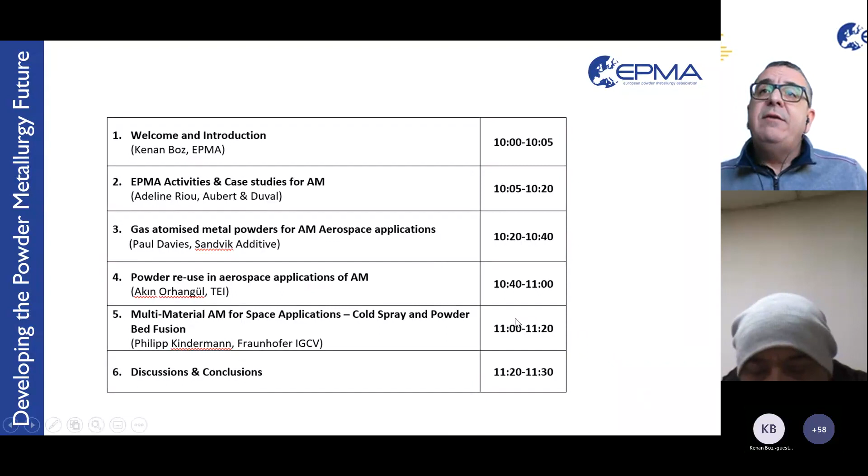And before that, I will give some information about the SAM project, and then we will finalize his slot by some interesting case studies, especially from AM. So good morning, Adeline. You can hear me, I think. Good morning, Kenan, and good morning, everybody. Yeah, thank you for joining.

Okay, so this is our short agenda, but as I said, unfortunately, Akin will not be able to join. Now we can continue with our agenda as possible. So let's start firstly by our explanation of the activities for the SAM project and what we have been doing so far in this big project. So maybe you can change the slide, Adeline.

As you all know, SAM is an Erasmus Plus project with 17 partners all around Europe, with industry representatives, education and training providers, and umbrella organizations like EPMA, Cecimo as well. The coordinator is the European Welding Federation. The project is supposed to be over by the end of 2022, but it is extended to end of June of this year. Next slide, please.

So in SAM project, one of the biggest achievements was the development of an international AM qualification system, named IAM-QS, which will ensure the transfer of knowledge process in a harmonized way for every organization internationally. Also, the IAM-QS provides a way to recognize technological knowledge for AM personnel. It supports through innovative training guidelines that cover the front-end emerging technologies of AM at an industrial level. It addresses specific industry needs and involves trainers from industry and case studies based on real industrial issues. It is also recognized as a best practice international qualification system by the European Center for Development of Vocational Training. So next slide, please.

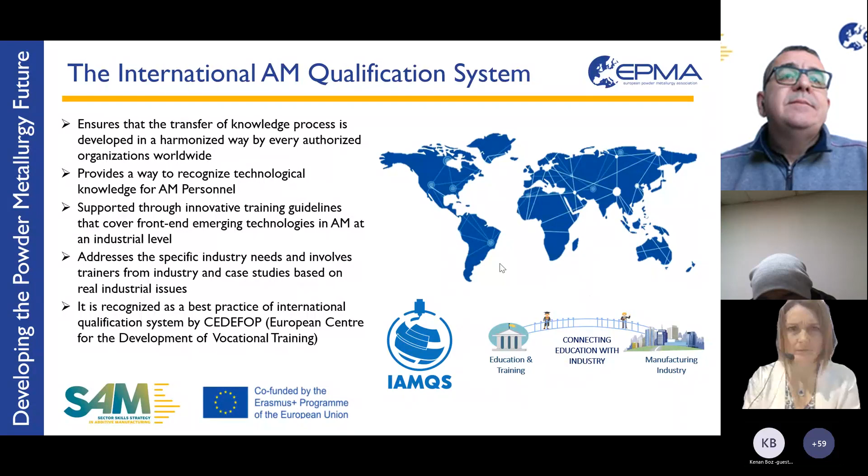So these are the AM qualifications that have been developed up to now, together with the SAM project as well as previous projects that are the ancestors of SAM. Profiles of AM process engineer, AM supervisor, AM operator, and AM designer have been determined. Their qualifications have been investigated and listed and prepared, and some work is still going on for other profiles for the AM-QS system.

As you may have followed such activities of EPMA or Euro AM Group, we organized some SAM free courses last year, and the year before as well, for developing the competence units as a kind of piloting training courses. They all worked quite well. In total, we had 28 hours of lecturing and more than 170 students attended these courses. These are now all accredited or certified course programs within the harmonized system of IAM-QS. You can follow all the recordings of these courses on the EPMA website.

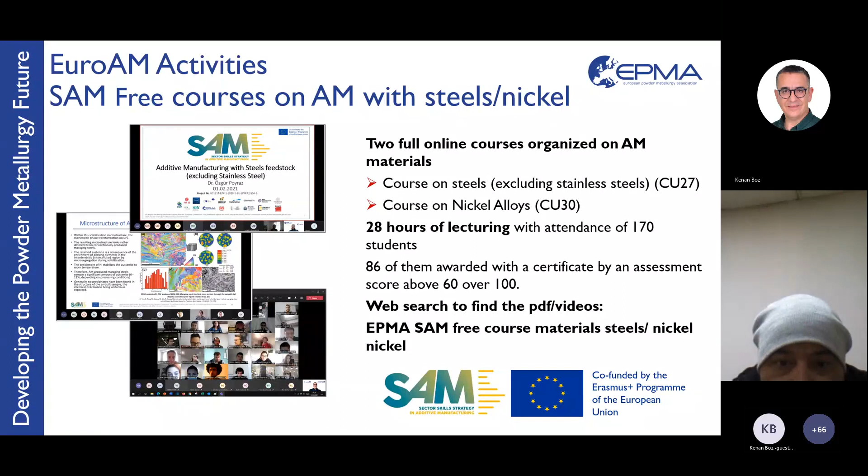So I'm going to highlight some activities planned by the group this year. One is the organization of a Euro AM seminar in May, which will be on site again after a few years of online webinars. It will run from the 9th to the 11th of May in France, in the city of Metz, in the northeast of France. The key topic will be metal powders in additive manufacturing, along with highlights of AM processes, advanced materials, and emerging technologies. It is organized together with the French Institute IRT M2P. So this is one key event.

We'll have then, of course, the European conference in October, which will take place this year in Lisbon, in Portugal.

Another key point is the publication of the 4th edition of the Introduction to Additive Manufacturing Technology brochure. It's a document which was first released in October 2015. We plan to release this year the 4th edition in order to update different chapters, in particular the technology chapter, improving the chapter about metal binder jetting and other sintering processes involving metal powders for additive manufacturing, as there has been a lot of new activity in this field. We'll also update the EBM chapter, the SLM chapter, and so on.

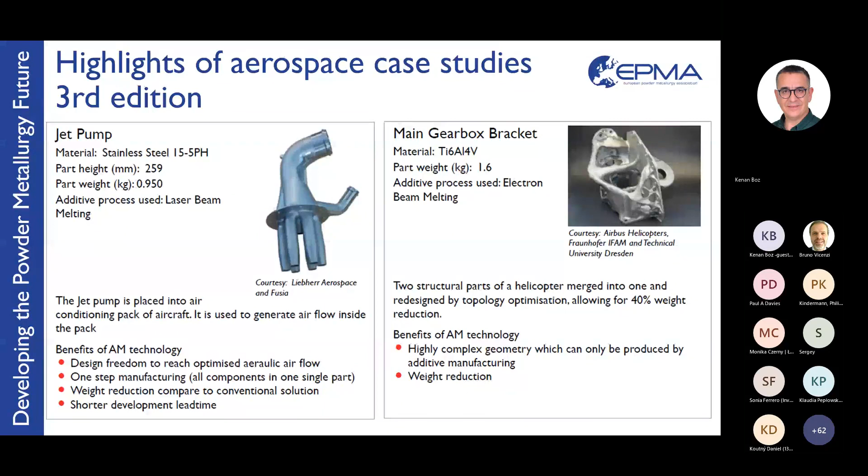If we go upper in space, here we have two nice case studies. One from Ariane Group and Volum-e about a casing for the Prometheus engine made with 718 material. This is a quite massive part, as you can see, which was produced on an EOS M400 machine, showing the design capability offered by additive manufacturing, in particular to minimize the supports for a large component.

On the right, you have a thrust chamber designed by Cellcore and produced with an SLM 280 machine by SLM Solutions, which is also an impressive part, with a height of 110 millimeters, made with Inconel 718, offering significant advantages versus conventional part manufacturing, in particular integrated design, mass reduction, and time saving.

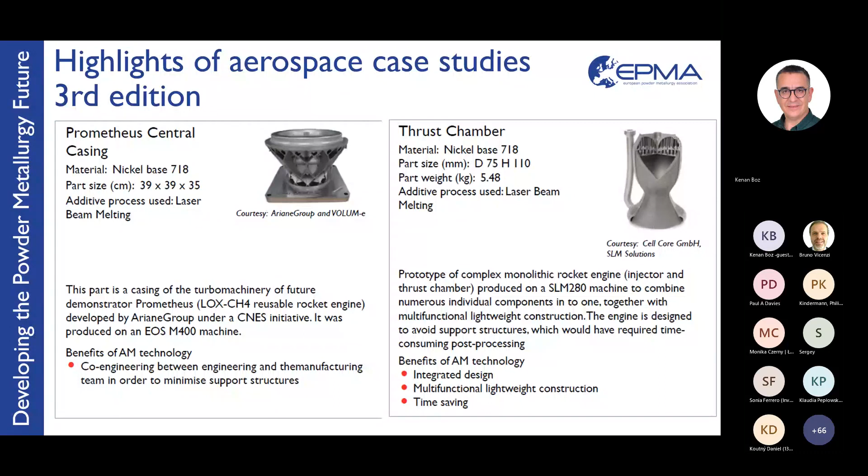So these were some of the case studies highlighted in the current edition of the Introduction to Additive Manufacturing Technology brochure. We are in the process of collecting new case studies. Here I wanted to show a few of the new ones we will publish in the next edition, and call for contributions if you have more case studies to provide for aerospace, and also for other segments.

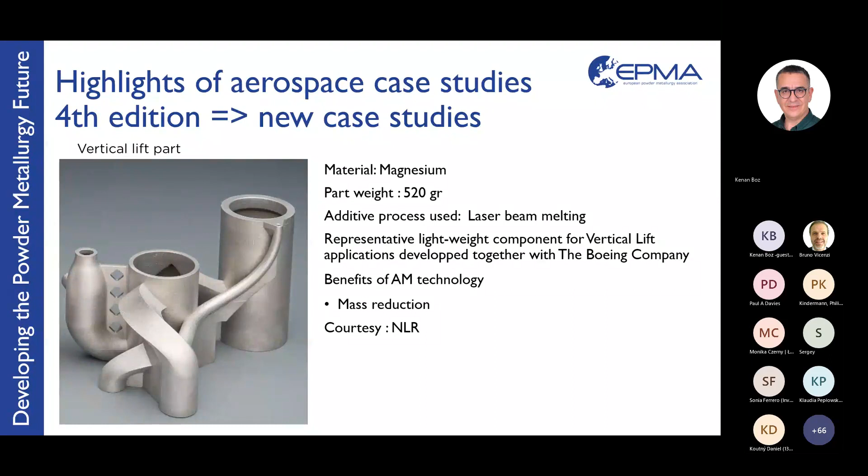Another case study which will be included in the brochure is a combustion chamber for a liquid-fueled rocket engine, made with nickel-based ABD 900 AM material. It's a part with a height of 291 millimeters, and it was successfully fired by Airborne in March 2021. The benefit of additive manufacturing in this application is integrated design, the ability to provide thin walls and complex cooling holes, and the high temperature strength provided by the ABD 900 material. This was done in collaboration with Renishaw and Alloyed in the UK.

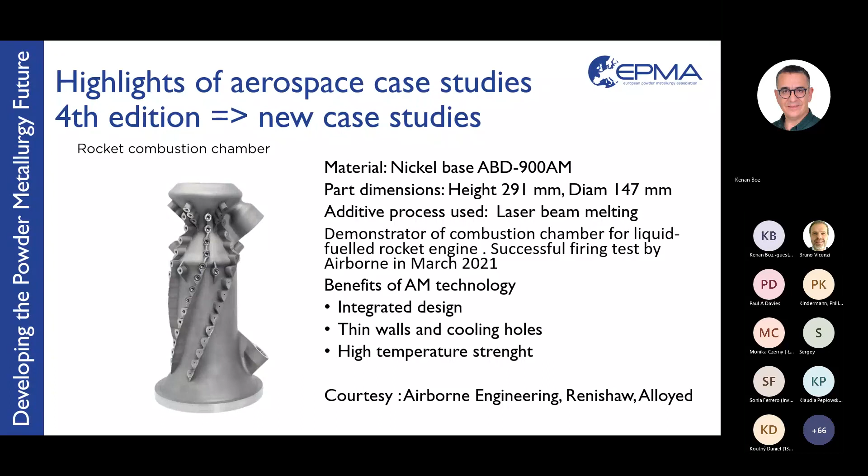So these are some highlights of aerospace case studies.

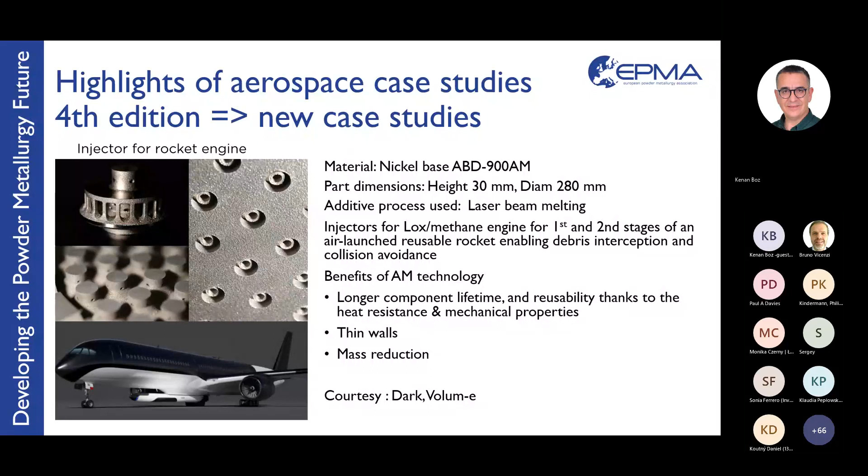We plan to release a new edition of the additive brochure in October at EuroPM in Portugal, and we will be glad if in the audience you want to contribute, or if you know people who could contribute with more case studies. The deadline for submission is in March, and we will welcome case studies for not only aerospace, but also energy, medical, industry and tooling, automotive and car racing, or consumer goods - any original application that demonstrates the interest of additive manufacturing with metal powders, as there has been a lot of progress in applications of the technology since the last edition in 2019.

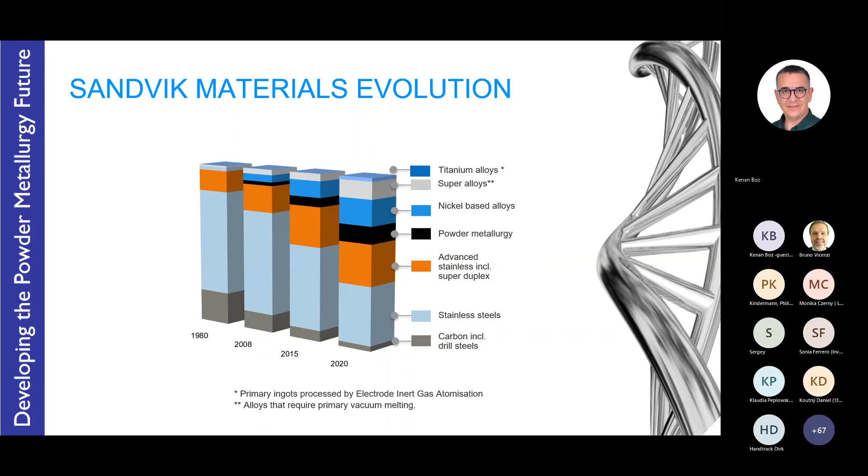Okay, so first of all, I'll start with Sandvik's materials evolution over time. Sandvik's been involved in the metals industry for more than 160 years, evolving from steels and carbon steels for the rail industry originally to stainless steels, then advanced stainless steels such as super duplex, which is heavily used in the oil and gas industry. Powder metallurgy then started to make an impact on the volumes of materials that we produced, and the interest in nickel-based superalloys for aerospace, and superalloys, which are of course melted under vacuum, mainly nickel-based alloys, and more recently titanium alloys.

So now looking at powder production processes. Plasma atomized powder is a well-established production process for manufacturing gas atomized powders, typically using argon gas. The raw materials for this process typically include wire-based feedstock, imported into the plasma atomization facility from a spool. So there's a wide range of different materials available, but it does rely on wire-based feedstock. Here you can see an arrangement of plasma torches, which provide both the heat to melt the feedstock and the gas supply to atomize the powder. Plasma, at the end of the day, is basically very hot gas, and it's a very well-established process for additive manufacturing, providing a range of different sizes, typically coarser to mid-size fractions.

Then we have a very well-known process called plasma rotating electrode process. This, again, is a very long-established process where the raw material is a rotating electrode, and again using a plasma arc to both melt the raw material and provide gas to create the particle surfaces. Because it's rotating, the forces involved spin off the powder particles, and then they're captured in a cylindrical construction. This process typically produces very spherical powder, generally of a coarse fraction.

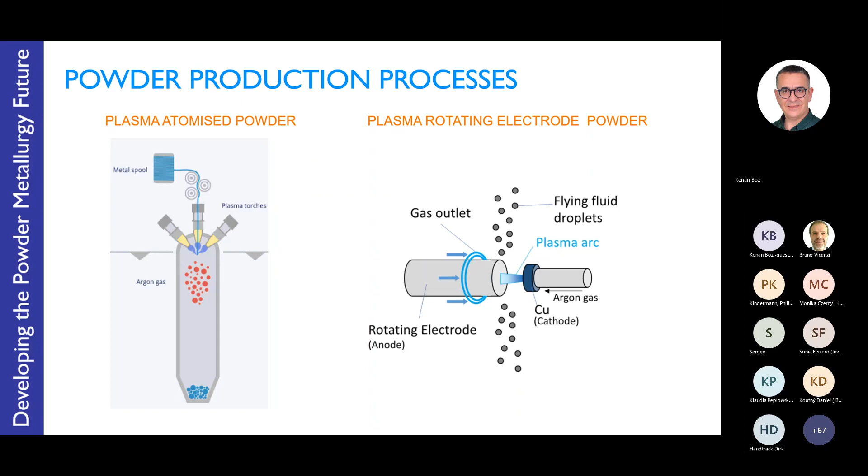Now I'll move on to inert gas atomization, which from a volume production process produces the highest volumes of powders for many different applications in aerospace, including hard surfacing and thermal spray materials. Originally, back more than 30 to 40 years ago, these types of powders were produced for coating turbine blades, for instance, and many other applications, and it has diversified into powders for metal injection molding, and more recently additive manufacturing.

Here you can see the construction of a typical inert gas atomizing facility. The raw materials are typically alloyed in a coreless induction furnace, often prepared in a melting enclosure of inert gas, which provides a partial pressure to protect the molten material from oxidation and reduce slag generation and oxides, often using nitrogen gas, which is the lower cost gas compared to argon atomization, but both are typically available on these types of facilities.

The molten material is sourced from scrap materials or alloyed in situ to create a diverse range of different materials, typically top poured, sometimes bottom poured, into a tundish, usually conical shaped, and the molten material is then drawn into the atomizer and impacted by high pressure gas, which can be in various different arrangements, from close coupled atomization for fine powder to two-stage atomizers for mid and coarse size fractions. So you can atomize different size distributions based on the configuration of the atomizer.

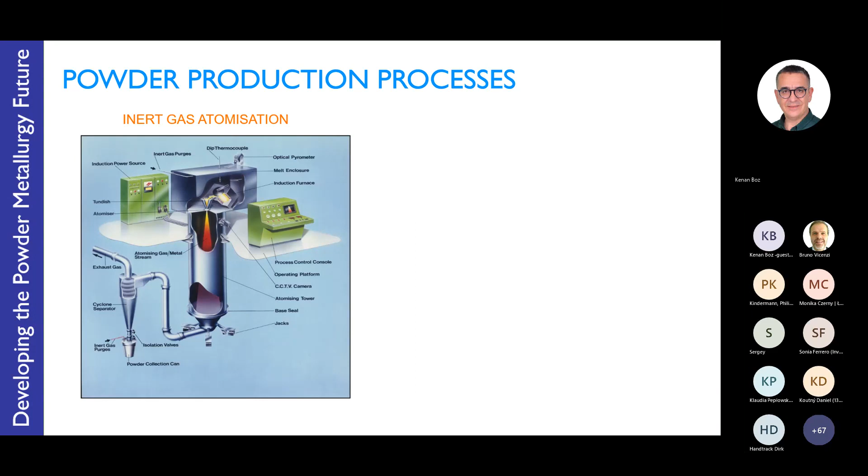This configuration does allow for recycling of the gases, and for argon that is sometimes justified in terms of the capital equipment investment.

As I mentioned, gas atomized powders have a spherical shape which imparts good flow characteristics. Because of the melting enclosure and the relatively clean process, metallurgically clean, it provides good performance when it comes to mechanical properties. The powder has a broad normal size distribution, as you can see from the diagram, and a very spherical shape across a range of different particle sizes, which provides good tap density or packing density. That can be very advantageous for additive manufacturing, providing uniform layers with good flow characteristics.

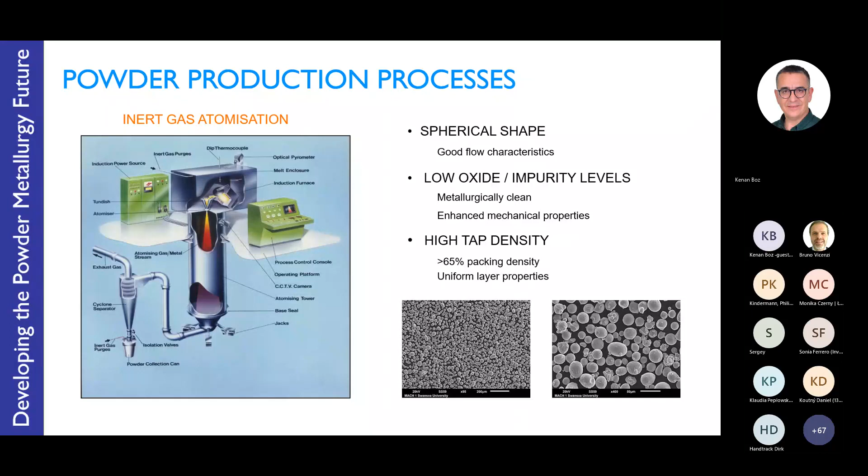Moving on from inert gas atomization, the premium process is the vacuum inert gas atomizing facility. A similar configuration, but in this case the melting process is completed, often top pouring again into a tundish, using a hermetically sealed chamber, where the various alloys can be trimmed and samples taken. It's a very efficient and metallurgically clean process when it comes to melting. Because it's done under vacuum, it produces much less oxidation of the melt, which in part improves performance.

Of course, you can't atomize under vacuum, so you have to typically backfill with argon gas. Most of the vacuum inert gas atomizing facilities run with argon atomization, but sometimes nitrogen is also available. Here you can see an example of a superalloy Inconel 718 powder with a size distribution of 15 to 53 microns, and a median size, D50, of around 32.7 microns.

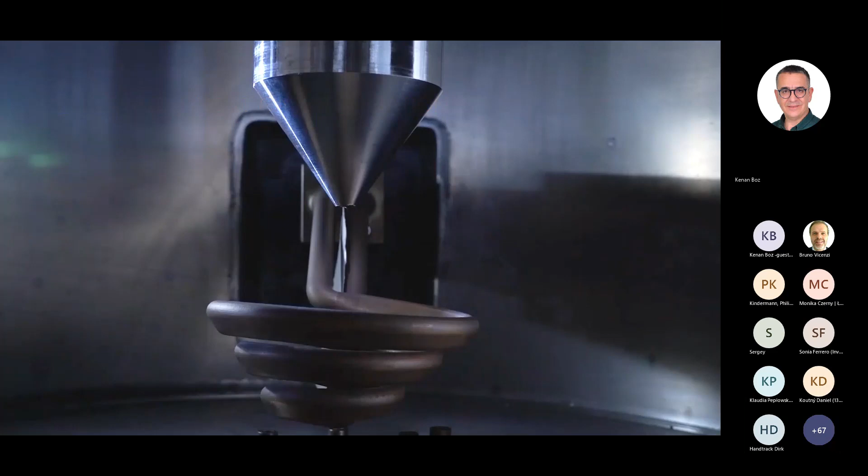Next I'll provide a little animation of a process called electrode inert gas atomization. You can see the electrode at the top. In this case, it's a bar stock material, inserted into a copper coil, which is actually hollow. That induces an electrical current, or eddy currents, in the electrode to melt the material. That coil is actually produced by additive manufacturing — see its complex shape. The molten material then free falls into the atomizer.

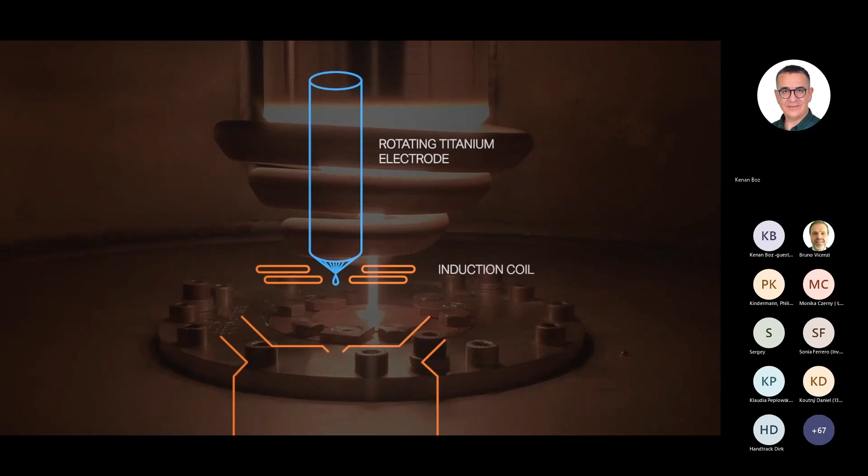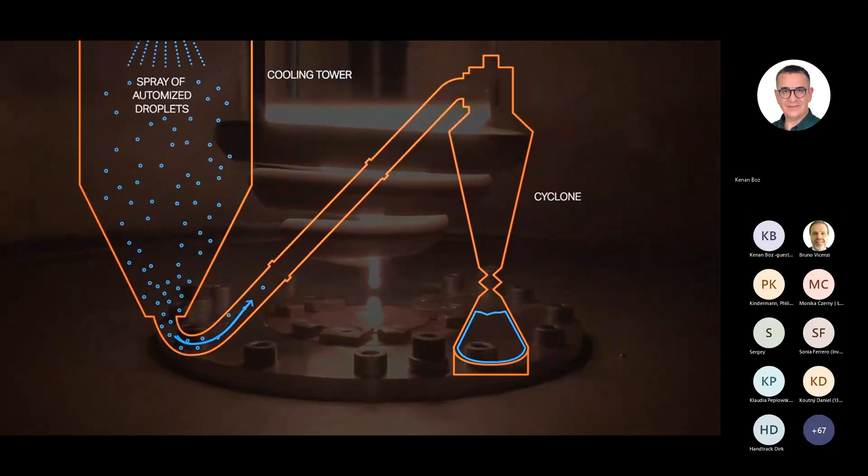In this case, it's titanium, so it has to be a refractory-free process. The atomization gas then impacts that flow of molten metal material. As it falls through the cooling tower, it solidifies, and again the powder is separated from the gas and collected. In this case, the titanium powders produced by electrode inert gas atomization are often handled under complete inert conditions, so the blending, sizing, and packing are all done under argon gas.

Just to highlight Sandvik's facilities in this area, we have inert gas atomization in the UK, with 10 inert atomizers, and have been producing powders at this location in South Wales, the Osprey facility, for more than 40 years, employing both argon and nitrogen atomizing. We have a range of different size distributions, from an average size of 5 microns up to 80 microns, providing powders for different applications, aerospace approved, with various ISO standards associated with health, safety, and environment, and ultimately providing credibility when it comes to sustainability.

In Sweden, there is a vacuum inert gas atomizing facility, mainly producing nickel-based superalloys, although it has the capability to produce various different materials including copper alloys, and an electrode inert gas atomizing facility dedicated typically to titanium alloys, using argon atomization. These plants typically produce slightly coarser average size distributions, from 20 microns, with coarser powders for applications like hot isostatic pressing. This facility is AS9100D Aerospace approved, and also has some medical certification for the titanium powders.

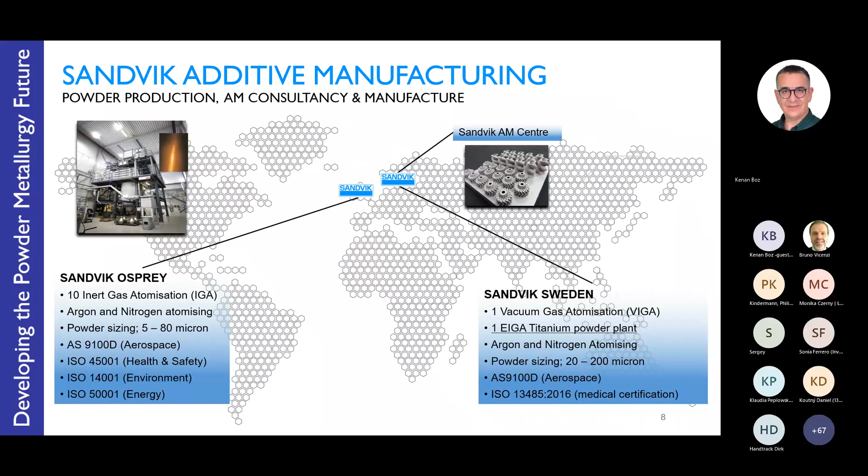When you produce powders, of course, you want to evaluate their performance. Sandvik has an additive manufacturing center of excellence in Sweden, with capabilities in laser powder bed fusion and binder jet printing. Sandvik also has links with some of the largest European additive manufacturing service centers, based in Italy from the BEAMIT facilities, and 3T in the UK.

Now moving on to the range of alloy powders for aerospace - they certainly are comprehensive. Inert gas atomized powders typically produce stainless steels, with 316L and 17-4PH accounting for the vast majority of stainless steels produced. Super duplex and duplex stainless steels, maraging steels, which were invented in the 60s and found applications back then for landing gear in aerospace because of their high strength and high toughness, have had a renaissance in additive manufacturing, typically because these materials have high strength but don't rely on carbon to impart that strength and hardness.

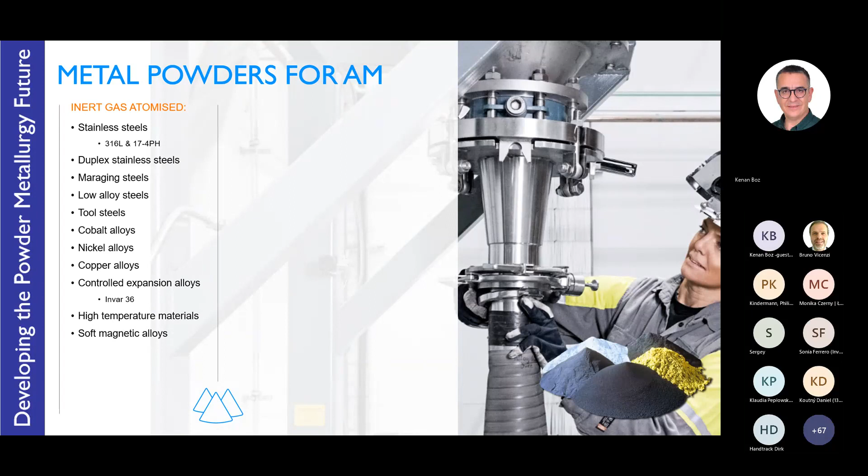Then we compare with vacuum inert gas atomizing, employing the process to manufacture nickel-based superalloys, so Inconels, as well as many more, and there is work going on to expand the range of nickel-based alloys. Copper alloys have also been applied, including copper chrome zirconium, and alloys developed by NASA called GRCop-42 - these are copper chrome niobium alloys. They're stable at high temperature but still impart good thermal conductivity. Electrode inert gas atomizing typically produces titanium alloys.

Of course, the workhorse of the aerospace industry is titanium 6 aluminium 4 vanadium, as well as commercially pure titanium and alloys related to the aerospace industry like titanium 6242, which has a slightly higher strength than titanium 64 and operates at a higher temperature also. Zirconium alloys are also possible and used in the nuclear industry. Then plasma atomizing produces titanium powders, titanium aluminides, titanium nickel like shape memory alloys, and titanium niobium, cobalt alloys, copper alloys, nickel alloys, as well as refractory metals - tungsten, niobium, and tantalum - and there are many others.

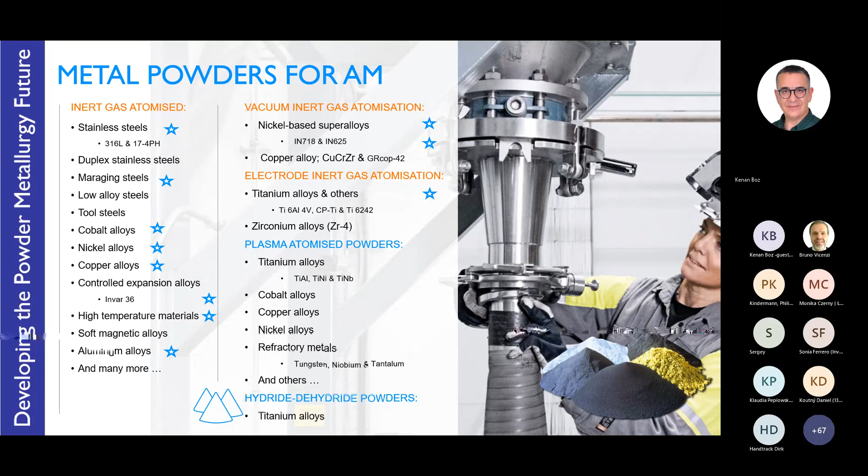Titanium, cobalt, copper, and nickel-based alloys are also available in plasma atomized powders. So now comparing the different types of powders: gas atomized, vacuum gas atomized, even water atomized are popular in metal injection molding, and plasma atomized.

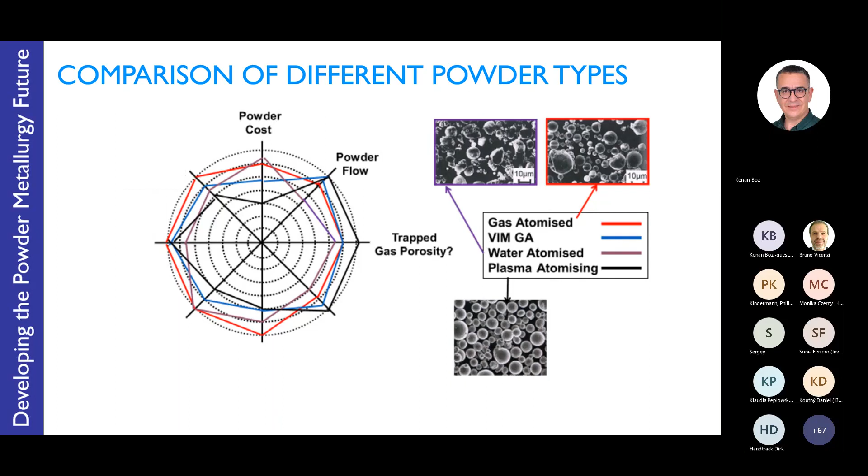You can see there are various morphologies of the powder that impart different properties. We have to consider cost of the process. Inert gas atomizing is generally the lower cost, with higher throughput in terms of volume and flexibility. Powder flow is an important characteristic, especially for layer-based systems like powder bed fusion and electron beam.

Entrapped gas porosity, especially for coarser powders, the oxygen level - there's no doubt an advantage for vacuum melting as well as plasma atomizing. The wide range of different materials available is certainly dominated by inert gas atomizing with its flexibility in terms of alloying.

The size range available - inert gas atomizing has been optimized for producing various different size ranges, with some advantage especially when it comes to fine powder production, typically in binder jet printing. Then there's packing densities and compatibility with different additive manufacturing processes. So, the powder attributes.

Key factors when purchasing powder: the shape and morphology have to be taken into account, and the degree of satelliting, which can impart issues related to flow characteristics. Often the atomizer's process has been optimized for specific applications, and anti-satelliting technology has been employed in inert gas atomizing for many years.

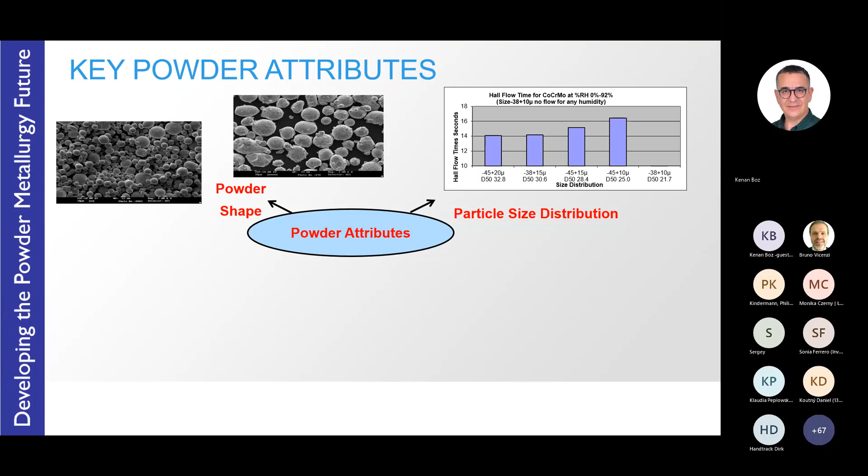The particle size distribution and its flow characteristics are important. Issues such as humidity - the Euro AM has a project starting to investigate the effect of humidity on flow characteristics. Here we can see the different size distributions and the effect on Hall flow rate.

As the average size drops, typically the flow of the powder becomes poor, until effectively, if you try to measure it by a Hall flow meter, it becomes very difficult, if not impossible.

Then batch-to-batch consistency - this can be for both size distribution and also the chemistry, and I've highlighted oxygen content, for instance. The starting oxygen content can have an influence on the use of the powder in service during laser powder bed fusion.

After a time, of course, it will pick up more oxygen, so having low levels of oxygen in the initial powder is sometimes an advantage. That's where vacuum melting in particular can be very attractive.

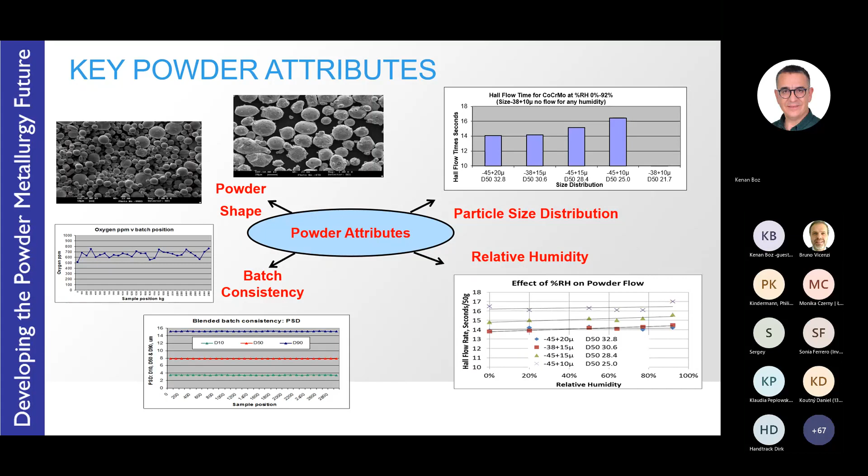Once you understand powder attributes, you have to develop test methods for establishing chemical composition, and analyzing the composition of powder is sometimes challenging. You have to develop standards and processes specifically for metal powders.

Size distribution, laser diffraction, and sieve analysis are very well established, as are flow meters - Hall flow meters, Carney flow meters, and even more recently, rotating drum methods of understanding the flow of powders is becoming very important.

Especially as the technology related to powder bed fusion is very much reliant on flow characteristics. Then we have other test methods for density of the powder - tap density, apparent density, morphology, microstructure, and thermal conductivity.

When you have done some testing, you need standards to measure these tests, and there are a growing number of test standards. Here's a few examples from ASTM for sieve analysis and sampling, oxygen and nitrogen content in titanium alloys, for instance. There's a growing body of standards where the aerospace industry can ensure reproducibility and conformance is important.

ISO standards are now linked directly when it comes to additive manufacturing to the ASTM committees as well. I myself represent the British Standards Institute as a representative on many different standards committees, and currently we're working on standards for Inconel 625, for instance, as well as stainless steels.

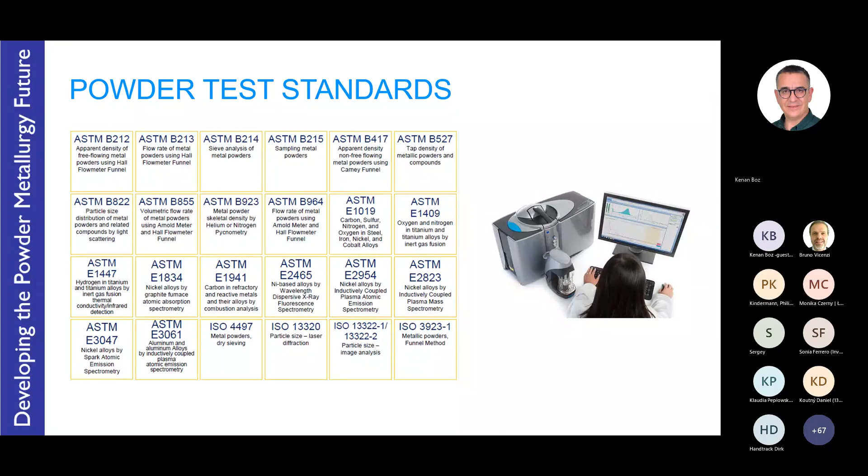Now talking about one particular aspect, powder size distributions - atomizing fine powders as well as mid-size fractions and coarse powders. These can be atomized, targeting different distributions for different additive manufacturing processes. Fine powder is typically used in metal injection molding, but also now finding interest in binder jet printing.

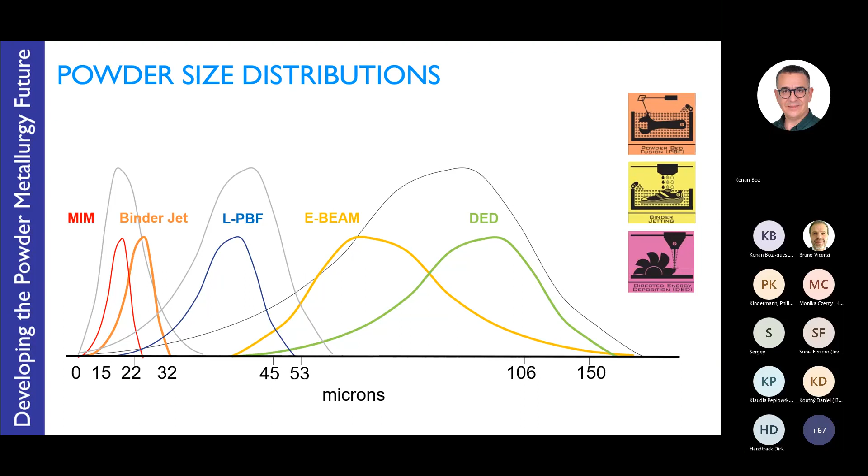Of course, the laser powder bed fusion, electron beam, and directed energy deposition processes, and even coarser or full fractions used in hot isostatic pressing of net shaped components, but also a very useful technique for consolidating the microstructure and eradicating pores - optimized for additive manufacturing.

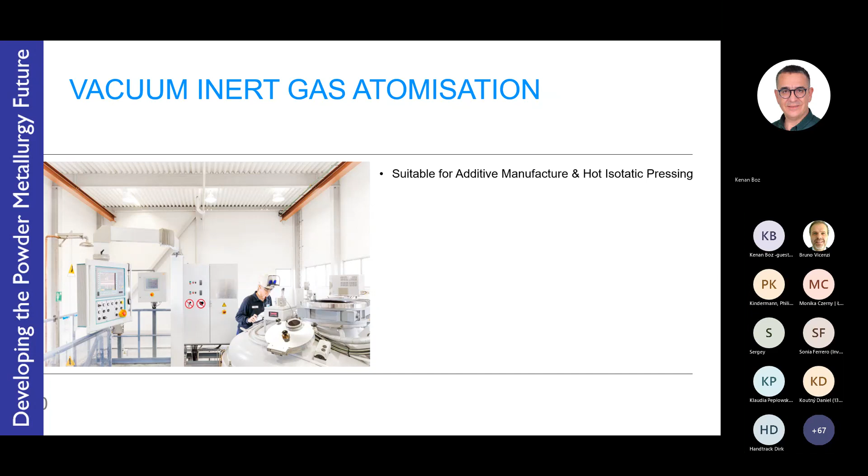Here you see the setup for a vacuum inert gas atomizing facility, producing powders for additive manufacturing and hot isostatic pressing. Compared to an open furnace situation, it's a much cleaner and safer approach, and I'm sure over time more and more facilities will be adopting the vacuum inert gas atomizing process.

It is currently producing a very wide range of different atomized powders in Inconels, nickel-based alloys, as well as more advanced grades like Hastelloys, Rene alloys, and MARM grades as well. These are currently being optimized for the laser powder bed fusion process.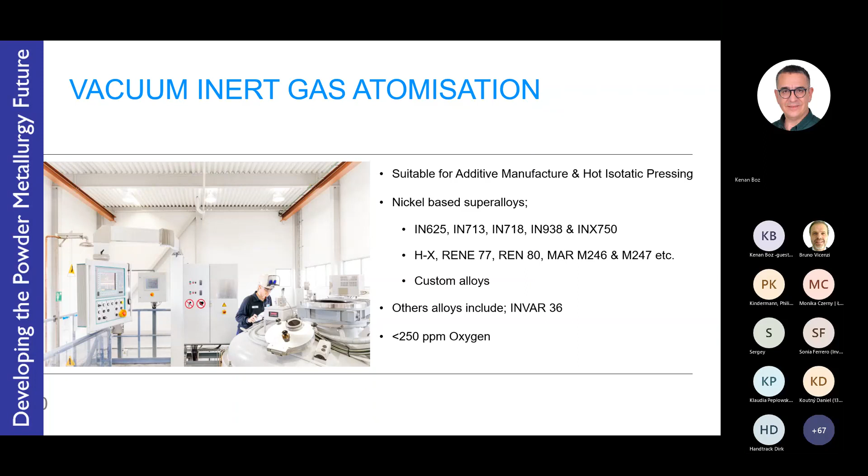Some of them are not weldable and therefore present challenges when it comes to producing the appropriate microstructures free from cracks, and custom alloys are being developed. Other alloys include specialist clean materials like INVAR 36, and the advantage of melting in vacuum, of course, is low oxygen and low nitrogen levels.

Taking one example of this 718 powder, here you can see a typical morphology of vacuum inert gas atomized powder. It is a precipitation hardened superalloy, melted under vacuum, then inert gas atomized. It has a combination of high strength and good corrosion resistance and can operate up to 650 degrees C.

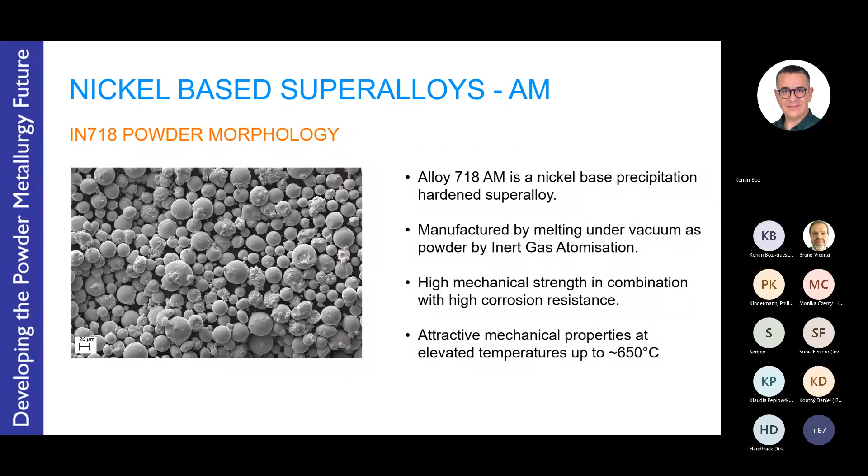Here presenting some properties comparing inert gas atomized Inconel 718, which is a slightly lower cost process compared to vacuum inert gas atomizing, especially from a capital equipment point of view. Here you can see the properties of mechanical strength in the vertical direction for yield strength and tensile strength, both at ambient 20 degrees and 650 degrees C.

Mechanical properties, elongation, and ultimately the vacuum inert gas atomized powders is found to be slightly superior in terms of elongation and toughness. No doubt when it comes to fatigue and creep performance, the lower levels of non-metallic inclusions in the vacuum inert gas atomized will be highlighted in these types of dynamic test criterion and will show superior properties compared to inert gas atomized powders alone.

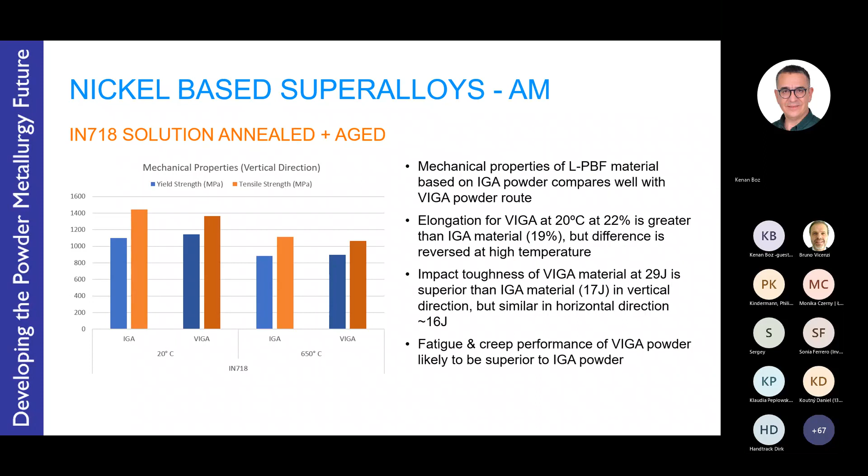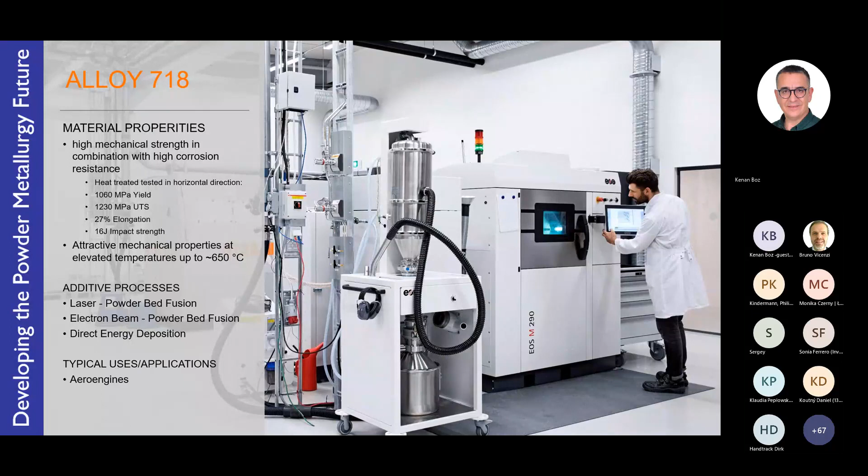However, it does depend on the application. For oil and gas applications, inert gas atomized is a cost-effective process, whereas for aerospace qualities, often vacuum is a pre-requirement. So there's a full material set of information in terms of yield strength, tensile strength, elongation, and impact toughness. These are available in different size distributions for all of the additive manufacturing processes, and of course for aerospace, gas turbines, and oil and gas applications.

So now moving to Hastelloy X, another popular product, but it does suffer from cold cracking during the laser powder bed fusion process. Here we can see some evidence of cracks in the microstructure. So some work was done and research was done to establish an optimized composition for inert gas atomized, where no cracks are evident in the microstructure.

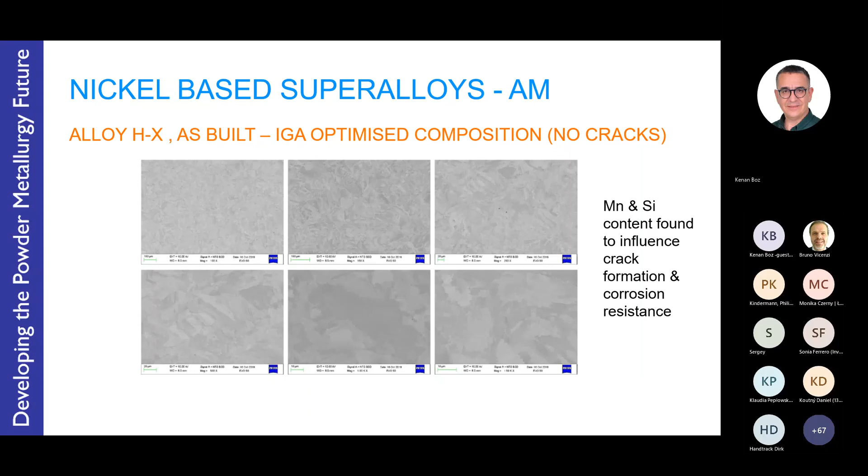In particular, manganese and silicon were found to influence the crack formation as well as corrosion resistance. Also, a vacuum inert gas atomized powder was developed where there are no cracks in the microstructure, which of course is very important.

Comparing the properties, here we see a comparison of inert gas atomized and vacuum inert gas atomized powders at 20 degrees, as well as operating at high temperature at 850 degrees C. You can see yield strength and tensile strengths provide very good performance, and yes, there's definitely advantage when it comes to vacuum inert gas atomizing at high temperatures. However, at ambient temperatures, there's not much difference between them actually.

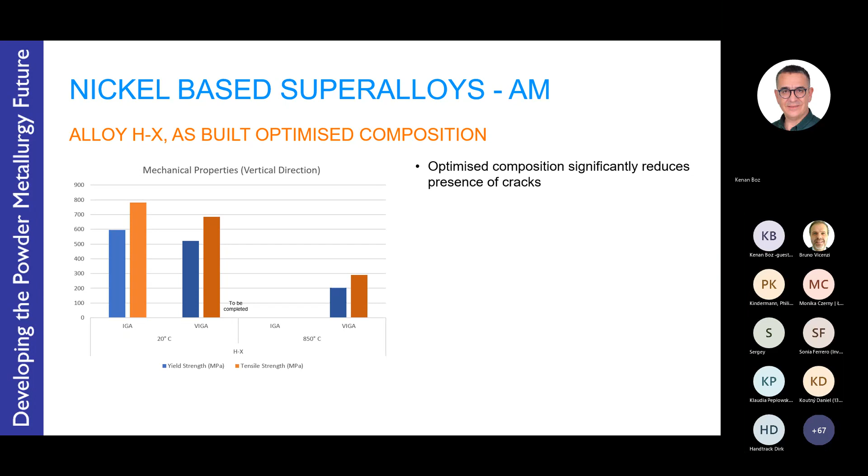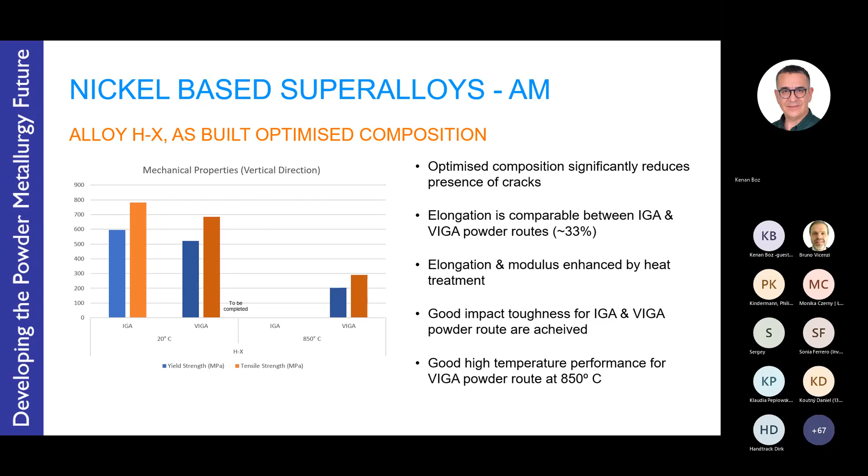Yes, so optimized composition reduces the presence of cracks. The elongation is comparable. Elongation and modulus was enhanced by heat treatment. Both inert and vacuum produced powders had good impact toughnesses. But really, when it comes to aerospace, having lower levels of non-metallic inclusions, there's definitely advantage for vacuum melting.

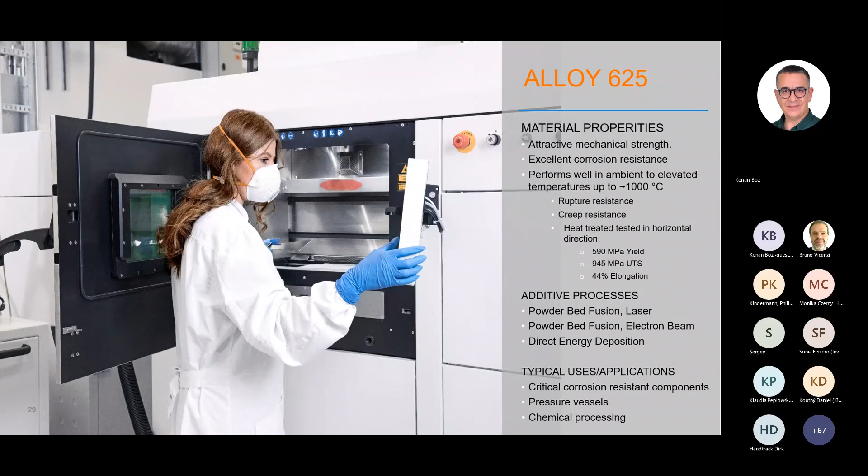Now moving on very quickly to another example, Inconel 625 has very high corrosion resistance and can operate at high temperatures. Good when it comes to critical corrosion as well, using electrode inert gas atomizing. Here we can see dedicated processing of the material under inert conditions, producing a wide range of different sizes, from hot isostatic powders to powders suitable for direct energy deposition or electron beam melting and laser powder bed fusion, with growing interest in fine applications for metal injection molding.

And there are now some initial machines in binder jet printing that are producing titanium components as well. So what does the titanium powder look like? A very spherical powder, actually, with a range in this case of 63 to 20 microns, and good flow characteristics. Of course, titanium has a relatively low density, so flow is impacted by its density as well as its morphology.

In this case, it has recorded a hall flow result at 38 seconds for 50 grams, but this was with the aid of a flow aid, typically added as a nanoparticle, less than 100 ppm, with a compatible composition in many cases. So it's very hard to detect, but that guarantees good flow characteristics, and so far has no impact on final mechanical properties, although there's still more work to do in that area. Available with and without flow aids, I would say.

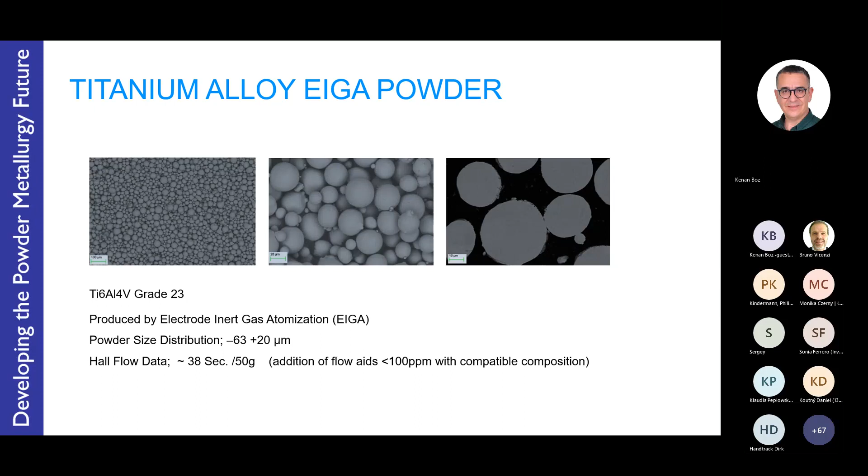Comparing plasma atomized and electrode inert gas atomized powders, there's very little difference in terms of morphology and flow characteristics, and the size distributions are very similar, as well as the oxygen and nitrogen contents, which are crucial in terms of mechanical performance.

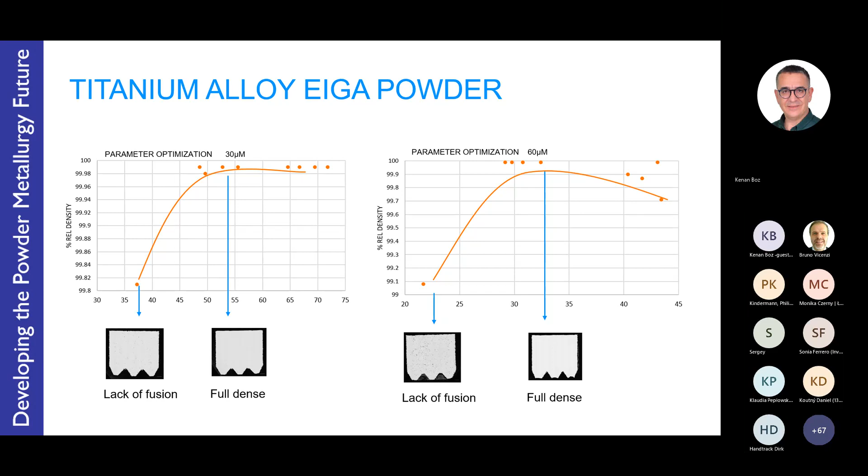Titanium alloys: here we see different layer thicknesses, 60 microns and 30 microns, optimized for the laser process. Moving from 30 microns to 60 microns effectively doubles the speed of processing. Titanium powders have then been optimized in terms of surface contours, bulk density, and surface roughness.

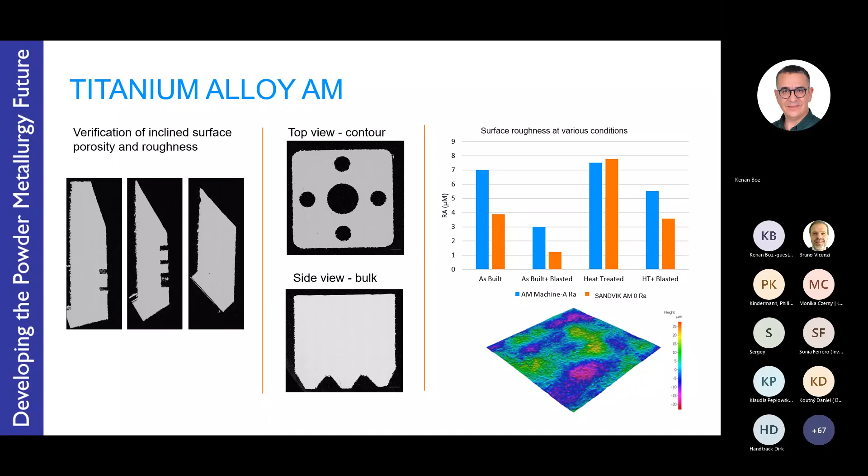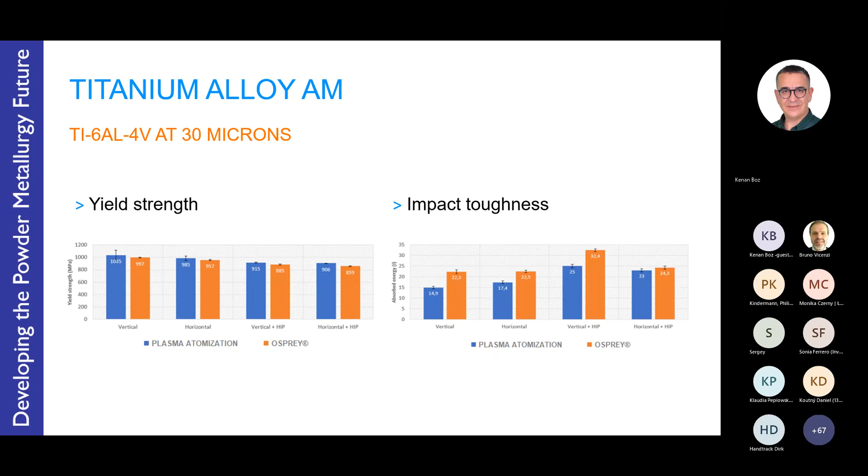When we have powders produced at different layer thicknesses, 30 microns and 60 microns, there's little difference between the mechanical performance, slightly better perhaps when it's at 30 microns, and the elongation actually slightly better when it's a 60 micron layer thickness.

Comparing the properties, here we have the tensile test for titanium 6-4, and there's definitely an advantage for hot isostatically pressing. Not so much in increasing performance, but in fact in improving the reliability of the statistics. So it reduces the variability of the titanium.

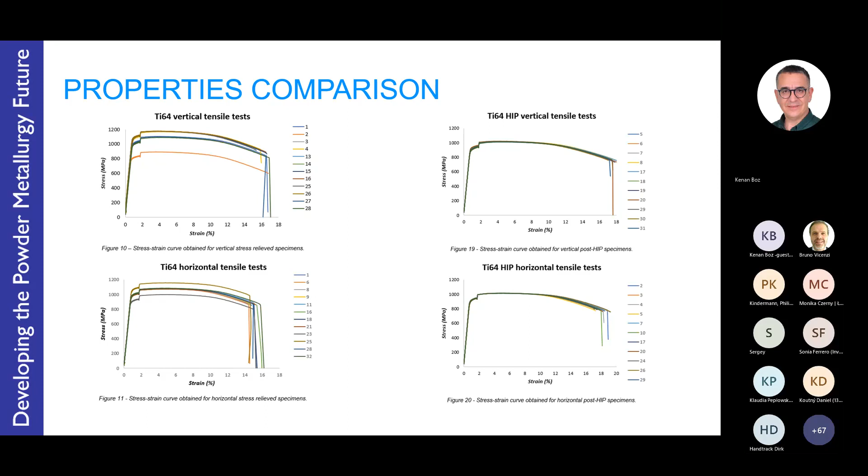This is all available from various different sources, documenting the heat-treated and hot isostatic press material performance in terms of tensile strength, elongation, elasticity, toughness, hardness, as well as surface roughness.

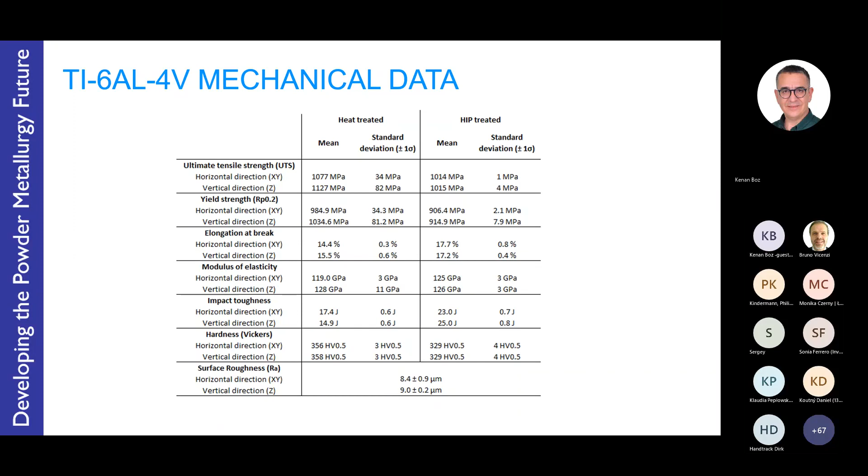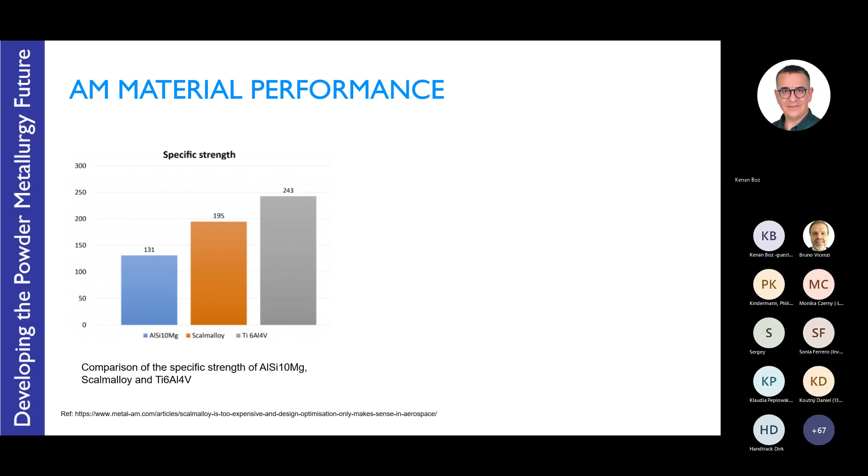Here we have an aluminium alloy, a relatively new alloy, Scalmalloy, compared to titanium 6-4. So for specific strength, titanium has the advantage. And likewise, when it comes to specific strength, titanium has the advantage here also.

If we compare density, however, aluminiums of course have a lower density compared to titanium. So you have to take all these factors into account when you're designing components.

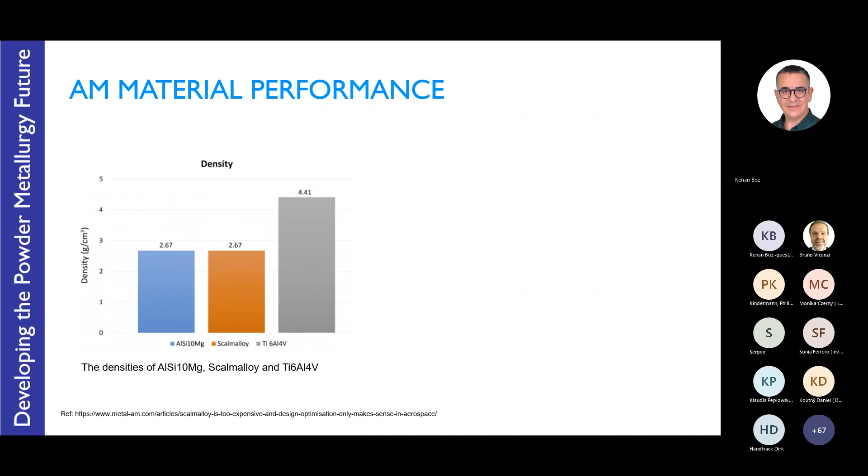Here's an example of a brake caliper, optimized design for both the material performance and capabilities in terms of aluminium alloys, titanium, and Scalmalloy. You can see complex structures there, generating a final component with optimized weight and performance in terms of its safety performance, approximately 60% of its maximum tensile strength.

Then balancing the material properties, the density, and the cost of the materials, you can select the appropriate material for the application.

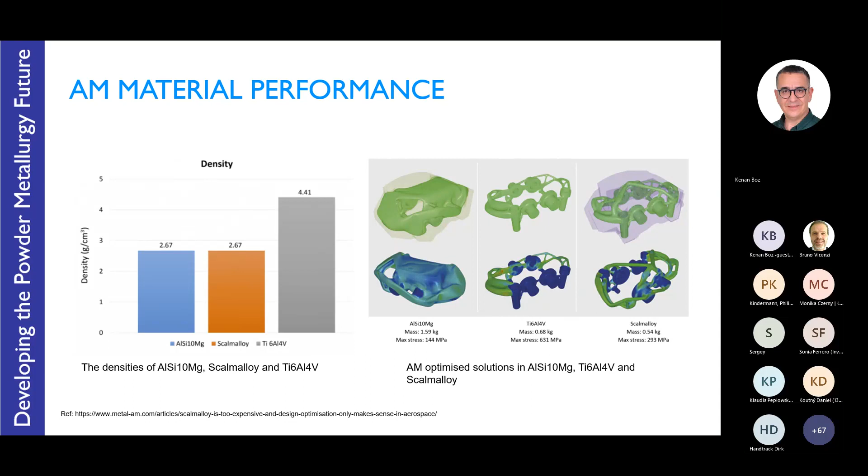Here we see a blisk designed by Seco Tools in titanium 6-aluminium-4-vanadium by laser powder bed fusion. Very good surface quality, and printed in one part as well. So that's definitely an efficient process.

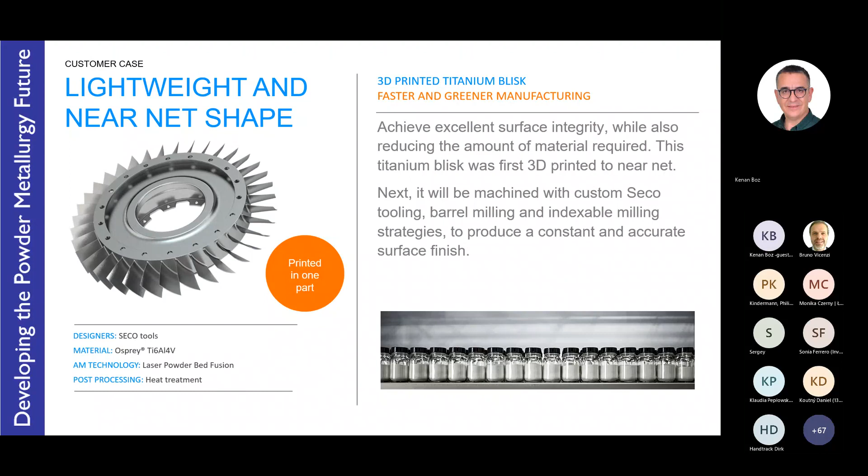Some other aerospace applications: Pratt & Whitney have been involved in powder metallurgy and metal injection molding for many years, and some of their new PurePower engines for the Bombardier aircraft are incorporating metal injection molding. And now they've stated that they have more than 100,000 prototype parts in additive manufacturing, many no doubt in polymers.

But certainly more and more in metals, where they were employing both electron beam powder bed fusion and laser powder bed fusion processes. And in production tests, Pratt & Whitney stated that they've realized time savings of up to 15 months and up to 50% weight reductions in a single part. So that's the typical aerospace and aero engine applications.

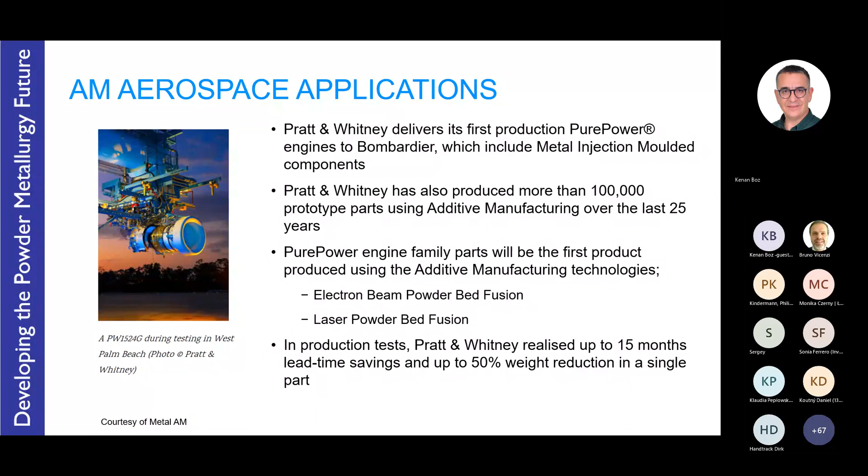Now we'll move on to the space technologies, or the space part of aerospace. And of course, we're all familiar with the European Space Agency, doing basic research, looking at discovery and applications, and employing technologies from different TRL levels, technology readiness levels, for their applications.

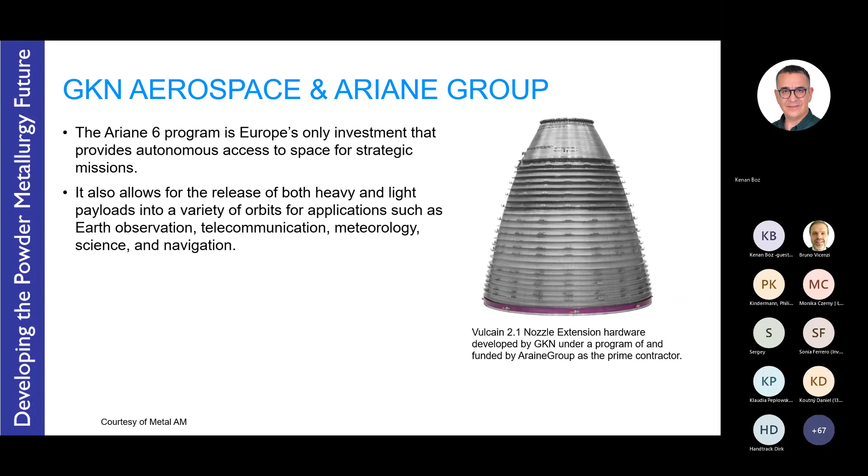This was produced by GKN in a program funded by the Ariane group. Ariane is a major European rocket launched from South America, but it's a wholly developed European program for both heavy and light payloads into space for applications such as Earth observation, becoming ever more important with global warming applications, telecommunications, meteorology, and navigation. GKN in their Swedish facility have been working with Ariane for many years, almost 50 years.

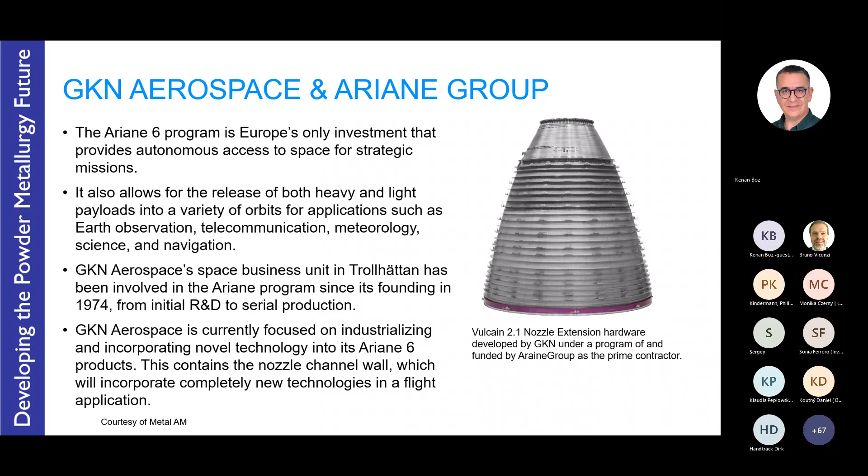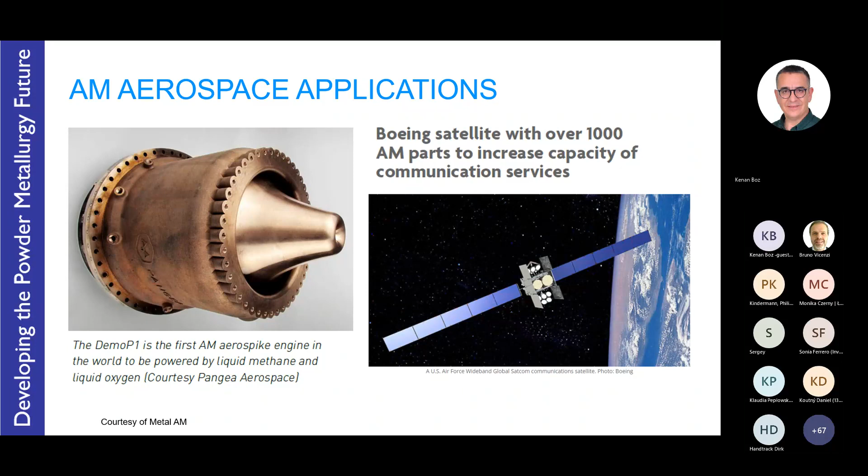I'll finish off with one more application. Here we see a rocket nozzle called an Aerospike. Boeing have also highlighted that they have more than 1,000 parts in their satellites, but I'll focus on the Aerospike engine. It's a development from the 1950s that has found renewed interest. At the time in the 50s, they couldn't really produce it economically enough. But with the advent of additive manufacturing and printing processes, being able to incorporate the cooling channels and complex internal structures, this type of rocket nozzle has found a new lease of life.

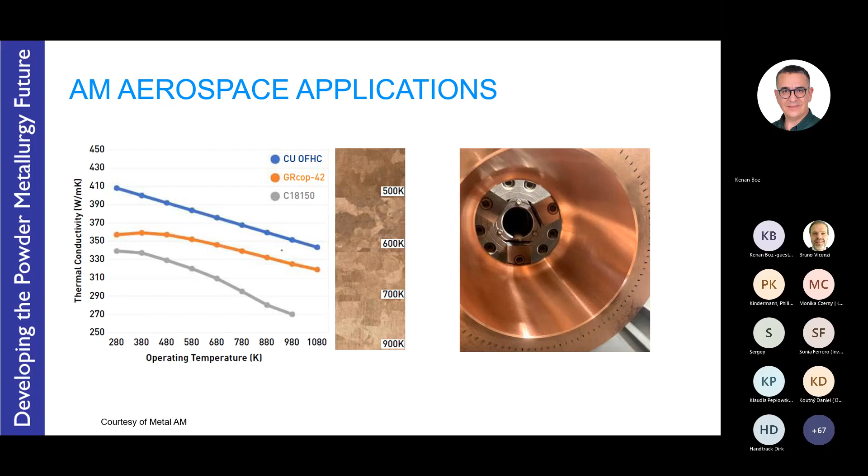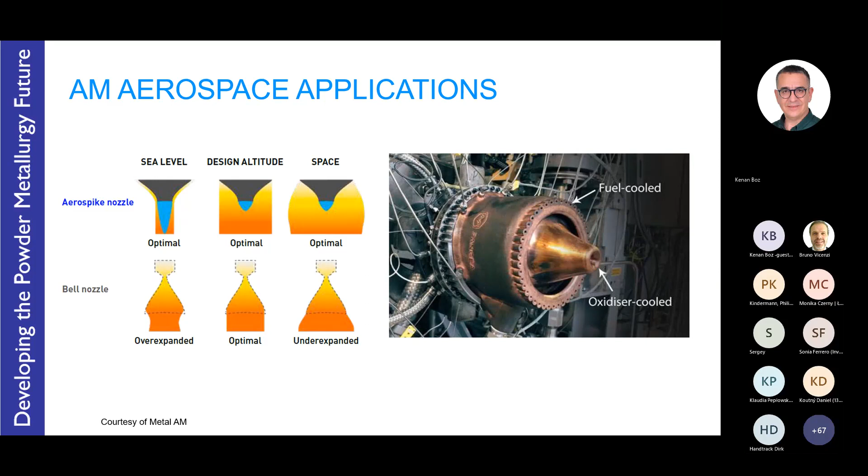The advantage of the Aerospike nozzle compared to the classic bell shape is it performs better at lower altitudes, where the rocket has most of its fuel and is heavier. That provides some performance capabilities compared to classic bell shape rocket nozzles in terms of the expansion of the gases from the rocket. Here we can see the application - of course it operates at very low temperature, but when you turn it on, it gets very hot, as you could imagine.

So in summary, gas atomized processes were introduced. Materials are manufactured using clean induction melting technology, incorporating a wide range of different materials, from stainless steels incorporating a lot of recycled material, copper alloys, cobalt alloys, as well as classic nickel-based superalloys, copper and copper alloys including the GRCop-42, and titanium alloys including new alloys like titanium 6242, which are now available in powder form. These have all been optimized for additive manufacturing in terms of powder size range, modified compositions for the process, like the example of Hastelloy X.

Process parameters have been developed to increase efficiency, moving from 30 micron layer thicknesses up to 60 micron layer thicknesses, for instance. All powders and alloys generally benefit from heat treatment to make sure that differences and anisotropy between vertical and horizontal directions are reduced. The microstructure and material properties achieve high performance requirements for the very demanding service conditions for aerospace applications. So in conclusion, there's a wide range of alloys available for additive manufacturing.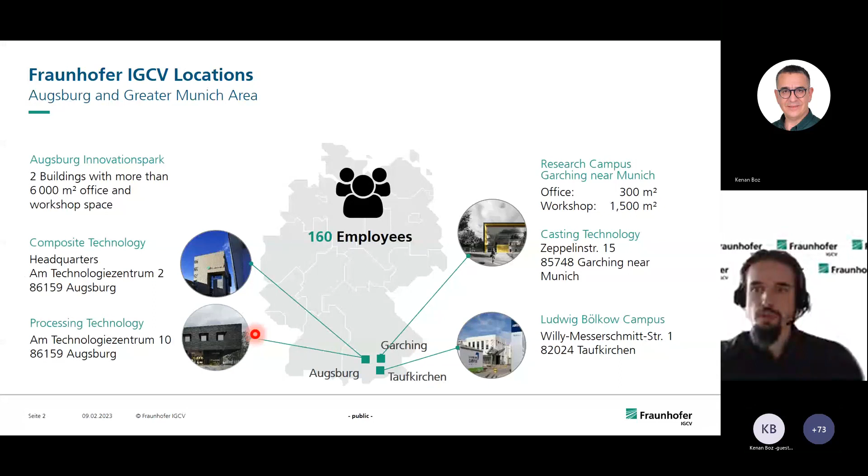I hope you can see my presentation. We are located in the south of Germany, in Bavaria. We've got three departments: one focusing on composite technology, one on processing technology, and a department for casting. In total, we are around 160 employees, and with a focus on AM, we've got around 30 researchers across all three departments.

In our AM at casting department, we focus on multi-step additive manufacturing, so binder jetting for producing sand molds and similar applications.

In our AM at composite department, we are focusing on extrusion processes for carbon fiber reinforced polymers.

Last but not least, we've got the AM at processing technology department, led by Dr. Schlick. Some of you may know him in the EPMA world. Here we are focusing on laser powder bed fusion and DED processes for the fabrication of metal, multi-material metal, and metal ceramic parts.

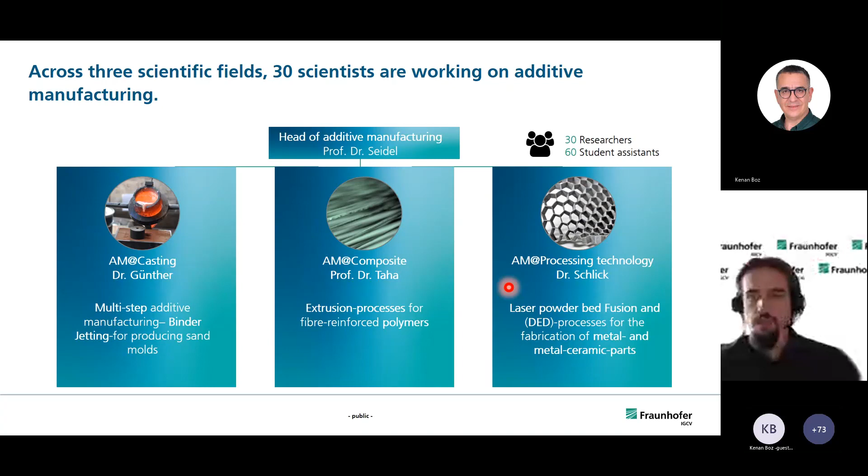So let's dive right into multi-material processing. What is multi-material processing? Here, we need to distinguish three different multi-material aspects.

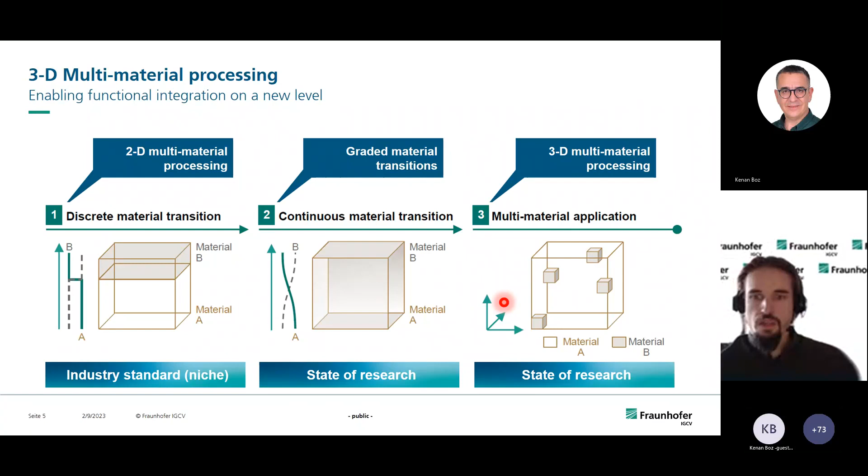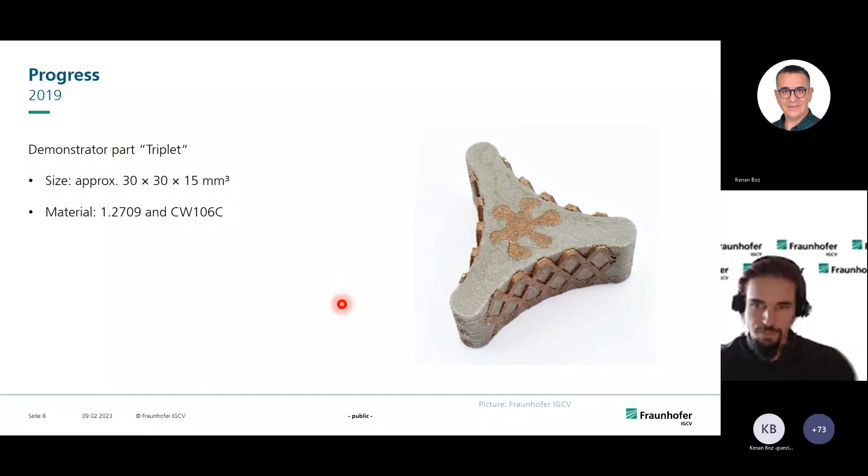Then we managed to get even bigger as we acquired our SLM280. Now we are able to build very large parts with, as you can see here, a side length of 280 millimeters by 280 millimeters. And you can also see that this is very clear, very sharp - so the resolution of the process is very high at the moment.

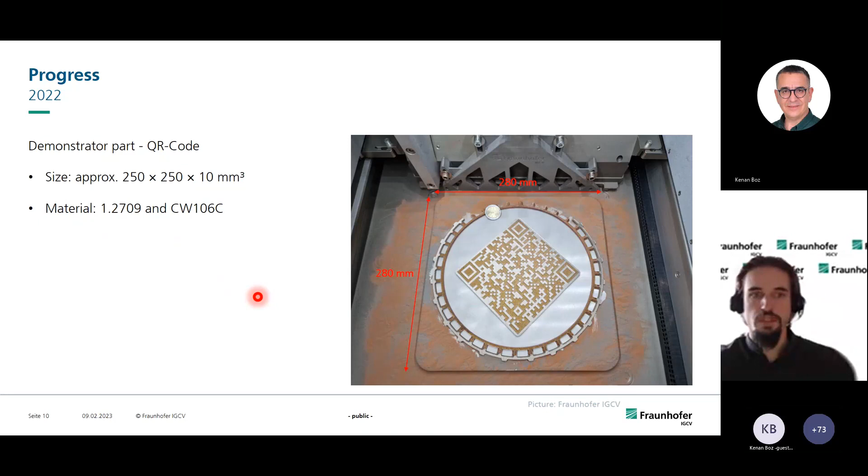Last but not least, you may know this part. This was one of our biggest demonstrator parts at the moment - a combustion chamber my colleague designed. It's 120 millimeters in height and still made out of tool steel and copper chrome zircon. That's why, as you can see here, the powder gets mixed within the process, so afterwards you have a mixed powder and need to separate it. Tool steel and copper chrome zircon is very suitable for that, as the tool steel is ferromagnetic and the copper chrome zircon isn't. So we've invented a mechanism which can separate the powders for us.

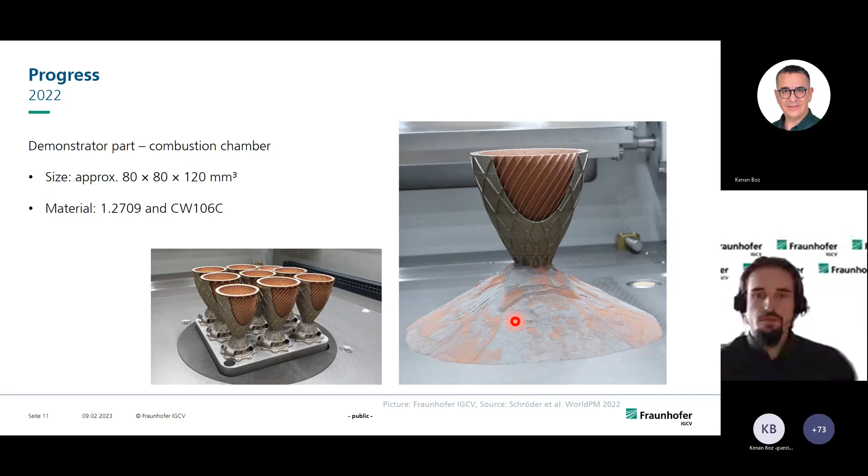What are the next steps and parallel initiatives? Of course, we want to use not tool steel, but alloy 718 and copper chrome zircon for space launcher applications. My colleague already made progress with this multi-material combination. The problem, as mentioned, is separating the powders, but we're working on solutions so we don't have to throw away all the mixed powders.

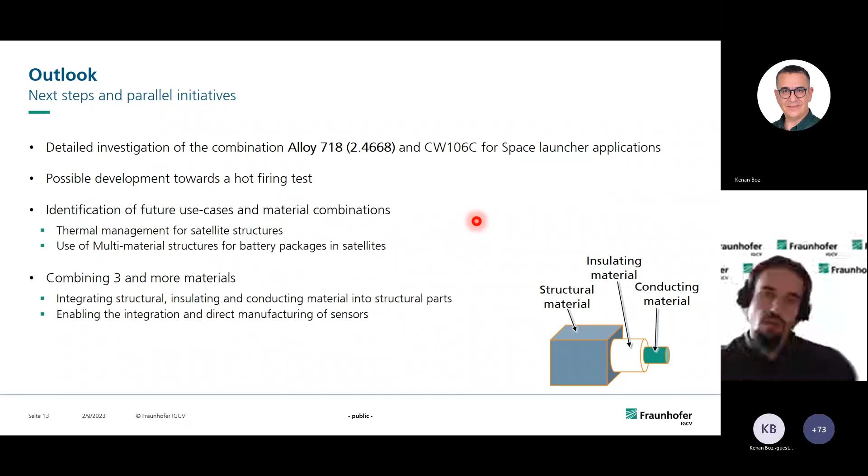That's where we are at the powder bed fusion at the moment, at the multi-material powder bed fusion. So let's head on to cold spray additive manufacturing. I don't know if all of you are familiar with the cold spray process, so here's a short overview.

Aside from a reduction of plastic deformability, all the properties of your powder actually remain in your parts, because there is no melting at any point. This is one of the biggest advantages of this process. It's not cold, as the name may suggest, but it's still not a melting process - thereby I think the term cold spray is still sufficient here.

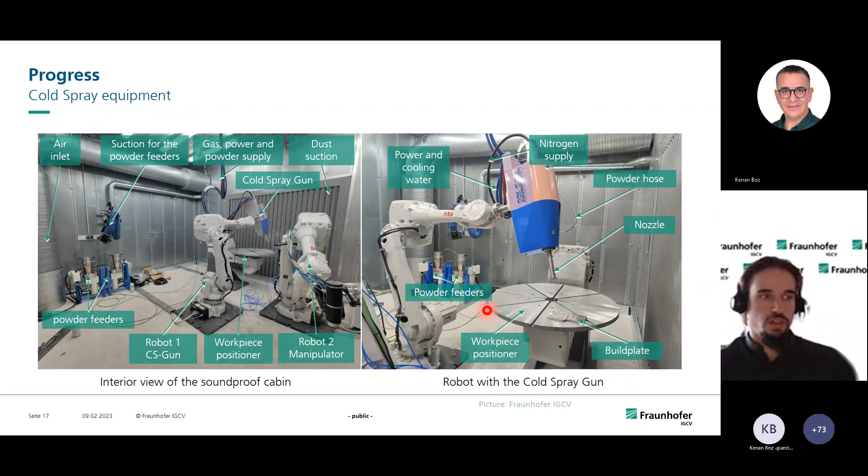The challenge when doing cold spray additive manufacturing - you need to know cold spray is actually just a surface thermal spray process for coating, but due to the process's ability to deposit large amounts of powder very quickly, it's also gained importance as an additive manufacturing process over the last couple of years. What still needs to be done is to identify suitable strategies to build up within a sufficient angle to the build plate. This is rather tough - you need very good robot path planning strategy to get rectangular edges.

Otherwise you always get just a Gaussian-like shape of your parts, and need to mill away afterwards much of your deposited material. As you can see, it's very fast - the build time here was only 30 minutes, and this is copper chrome zirconium built on an aluminum substrate.

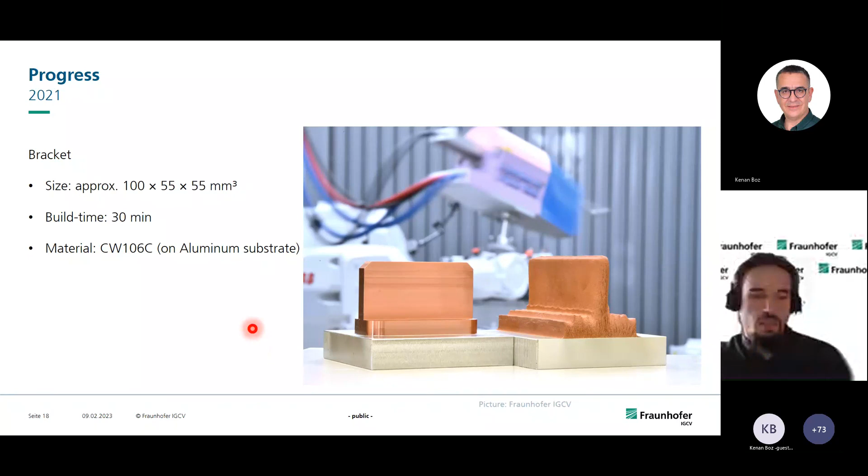Furthermore, we wanted to build Inconel, or alloy 718, with cold spray. This is a rather tough task because of the high strength of Inconel 718, but we managed to get very high densities. This was actually quite a quick success we had there, but we had the problem that large material depositions of alloy 718 detached even during the process and cracked during the process.

And the solution was very simple actually, but nevertheless it took quite a time to get through it. It was just increasing the traverse speed of the robot, which was guiding the cold spray gun. So we achieved a less local energy input, and by that we managed to get a good bonding of the sprayed material to the substrate.

300 millimeters per second weren't even enough during the specimen preparation, these also cracked away. But with 500 millimeters per second, we managed to get a good bonding to the substrate, which is actually one of the key features you need for processing multi-material. And yeah, that's where we are now, where we want to go.

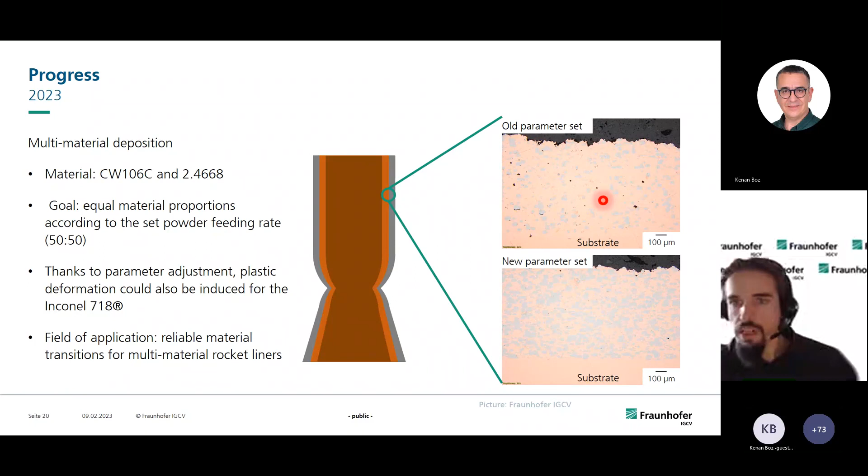So this you can see here was with an old parameter set. We got mostly copper chrome zirconium, and a little bit of alloy 718 placed within it. And if you look closely, you can see that the alloy 718 hasn't really deformed yet. So actually this is not - it was just embedded into the copper chrome zirconium, but the alloy 718 was not really cold sprayed, as it didn't plastically deform.

And with the new parameter set, with a few adjustments, especially regarding pressure and temperature, we managed to get both materials, the copper chrome zirconium and the alloy 718, to plastically deform, to get a rather homogeneous multi-material application of both materials onto a copper chrome zirconium substrate.

So why is this important? Because when we are building up a rocket liner, we want a sufficient and reliable material transition from copper chrome zirconium to alloy 718. That's why we first want to spray copper chrome zirconium, then spray the mixture of both materials, and afterwards pure alloy 718. This multi-material approach means especially the continuous material transition, as I mentioned in the introduction.

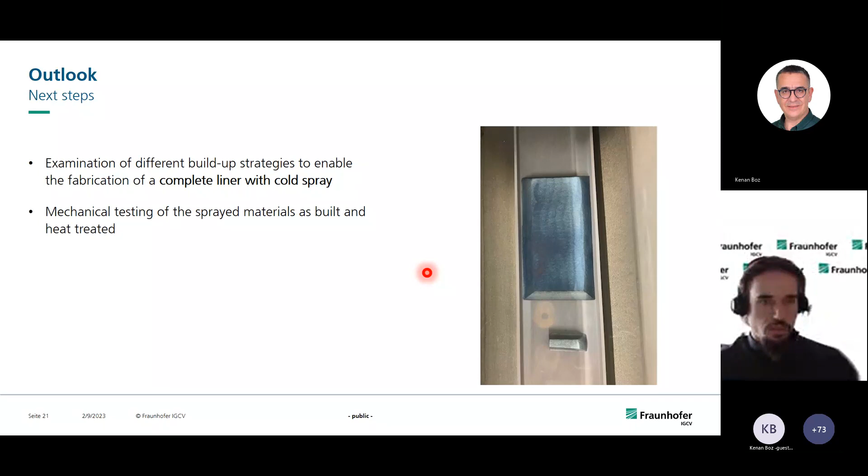Thank you very much. Thank you, Philipp, that was a really interesting presentation. And now we have actually run out of time, but shortly I will try to get some questions in. Paul answered his questions directly, thank you Paul, so I will take care of some questions for Adeline.

So Adeline, how many of these parts are today in regular production or flying, asked Pollard. And also he asked, how do you see the wire competition against powder in AM? About the number of parts in aerospace, unfortunately there is no public statistics, and in a number of cases parts are not public.

The serial part, we see mostly prototypes, but what is for sure is the number is increasing every year. More and more parts are being qualified progressively in different materials for aerospace, both in engine and aircraft structure, but also in many other aero-related applications and space applications, such as helicopters, rocket engines, and satellites. Maybe tackling the other question, which was on how we compare powder and wire.